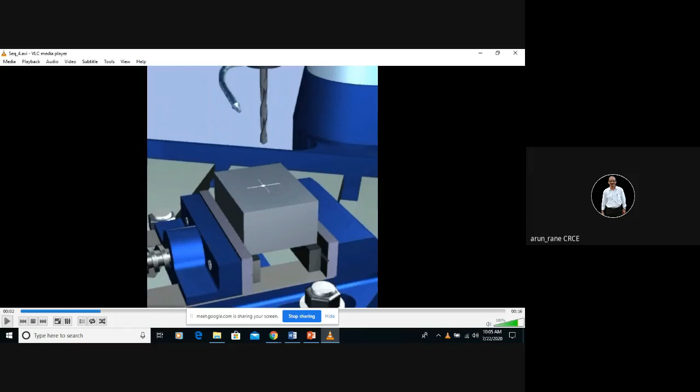So, one small video. The screen is visible, isn't it, Rutika? Yes, sir, screen is visible. So this is a small video on a drilling machine. This is a workpiece which is clamped in a vise. This is called a vise.

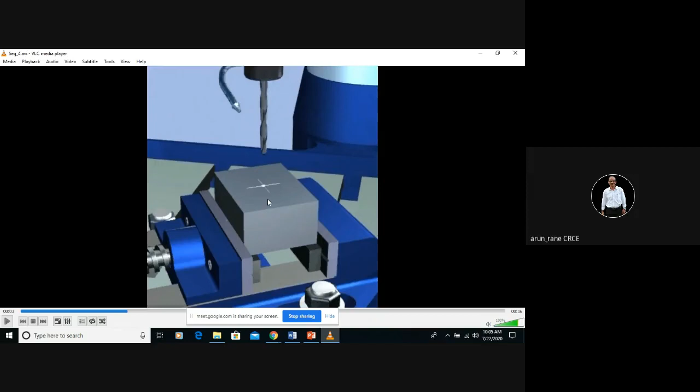Now, as I told you, you have to do marking. If you are not using a jig, then for every piece you have to do the marking like this. First, you apply Prussian blue on the surface so the marking will be visible. Then you center punch, use the center drill, and follow with a drill. So if you are not using a drill jig, you have to do all this process. If you are using a drill jig, this is not required.

This is your coolant, this is the drill. This is called the drill chuck. This is your workpiece, and these are called the parallel blocks on which the workpiece is kept.

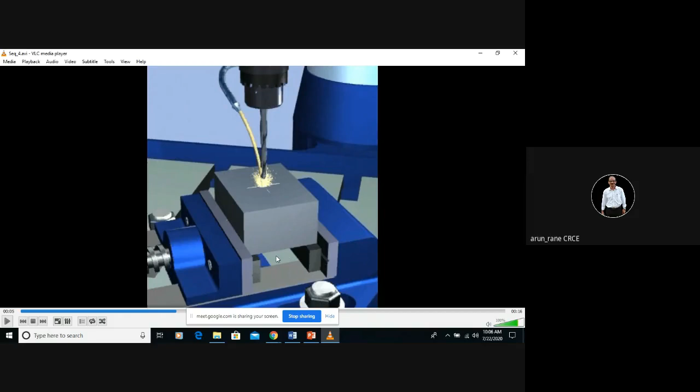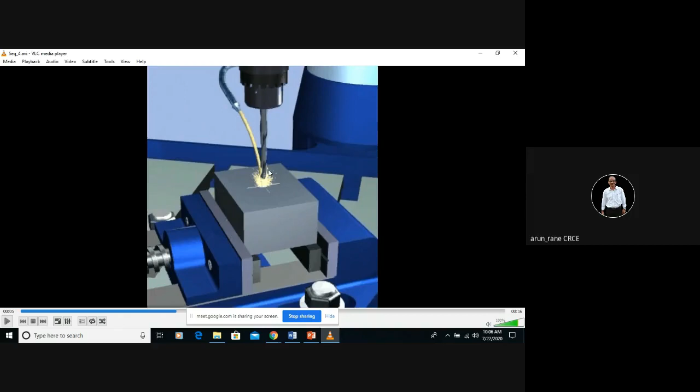Now you have to see that whatever hole you are drilling, it will pass through, meaning the drill should not touch any blocks or other pieces kept below the workpiece. There has to be a clear hollow portion so the drill will not touch, get damaged, or break. So that care you have to take.

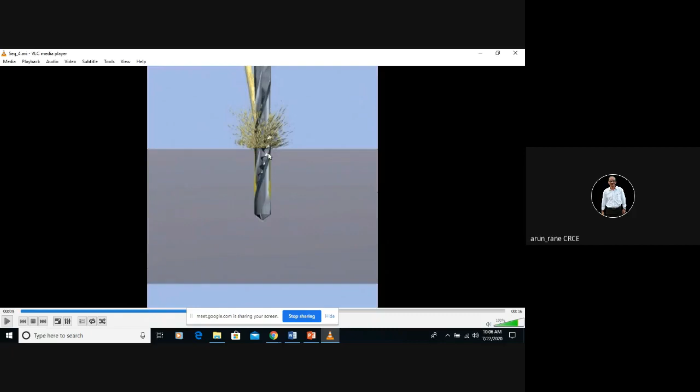So this is how the drilling takes place. These are the chips coming out of the flute. The function of the flute is to guide and remove the chips. If the flutes are not there, there is no way for the chips to come out. The chip will get blocked and then the drill will break because of the chip force. This is how the chips are coming out.

One more short video, same thing but in close up. This is how the chips come out. This is for dry cutting - we are not using any coolant here.

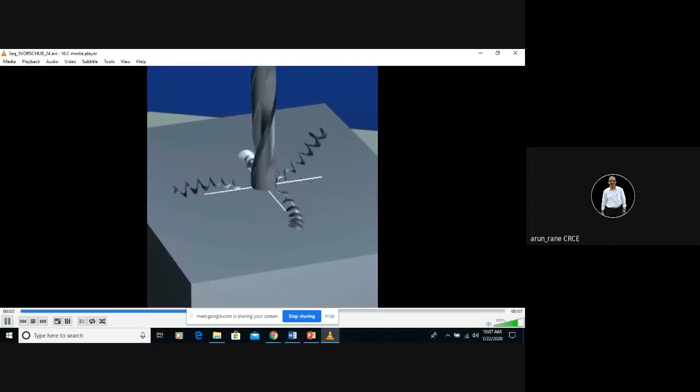Some images, drill images, and how the drill machine looks like, I'll show you one by one. Just have a close look at this image because this is important from your examination point of view. The question that will be asked is for 5 marks.

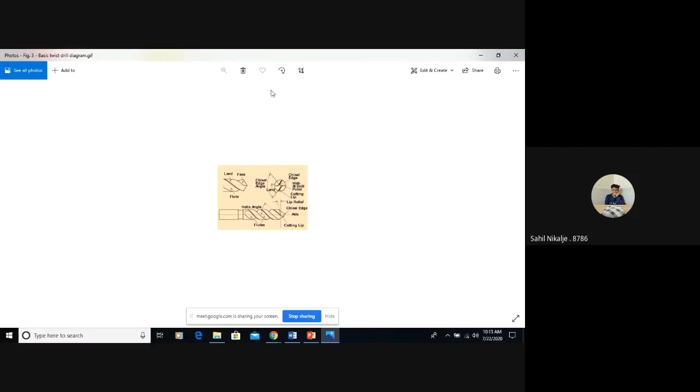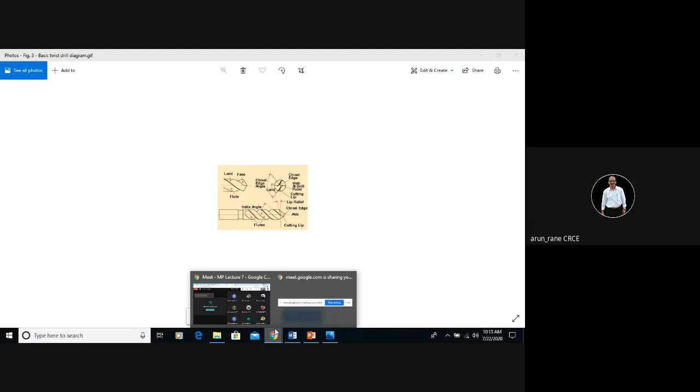Sorry. So Arnold wants to join in too. Just a minute, he always comes late. I don't know why even Dimple is constantly trying. Hello, yeah. I already admitted, no? Okay, okay, fine, I'm in the lecture now. I'll admit you, alright. Just hold on, just hold on.

I cannot see you waiting. Yes, just join again, please.

Problem is I can't see anyone waiting. Everybody has been admitted. Have you put the code properly? Link this, then there should not be any issue. Yeah please, please try again. I can't see anyone waiting. Stop sharing again. Sir, I think you should restart again because yesterday the same thing happened to me also, me and Madhvendra, same thing.

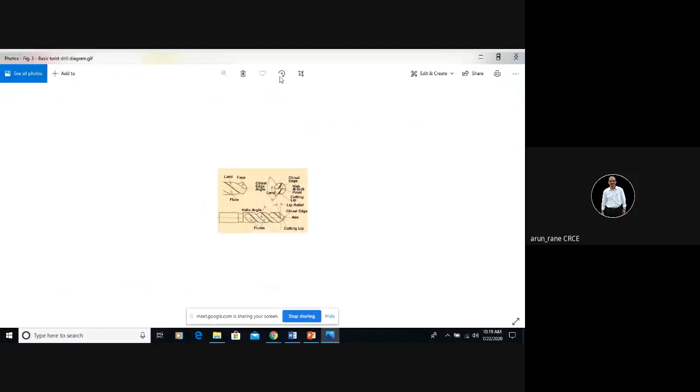Same diagram as earlier, it's the same diagram. I will suggest that you can use this diagram, which is more clear and it is easy also to draw this drilling machine.

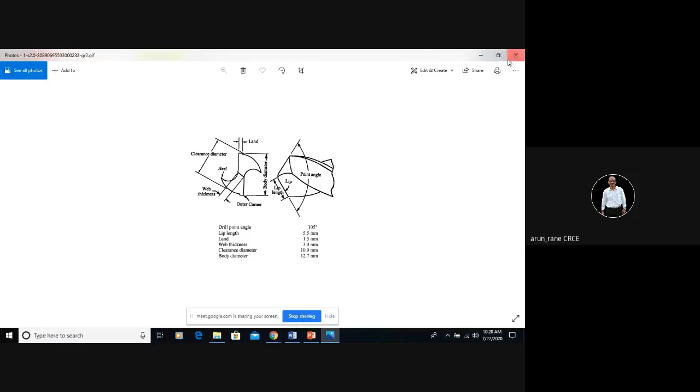The image loading is taking time. It depends upon the internet connectivity also. It's taking time to load. You'll have to hang on.

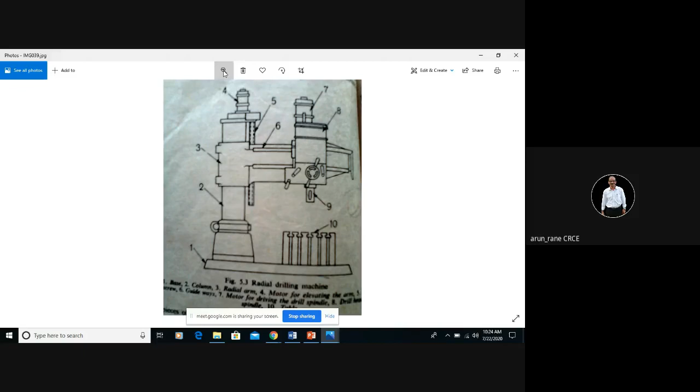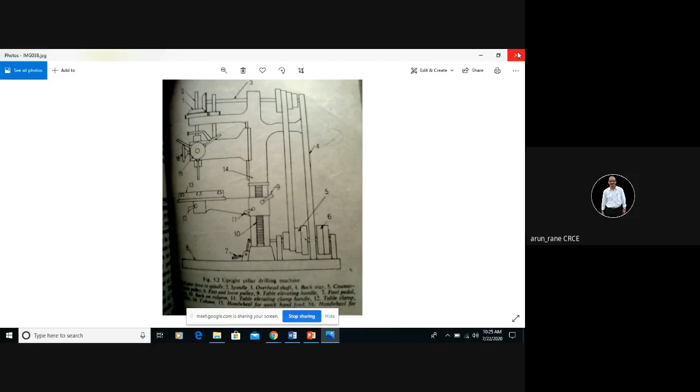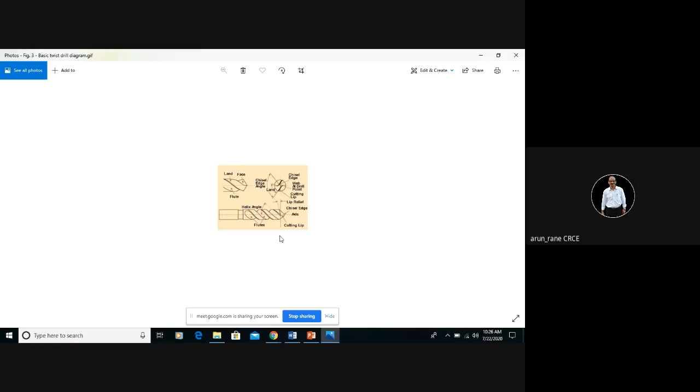I wanted to maximize this, but it is not. Okay.

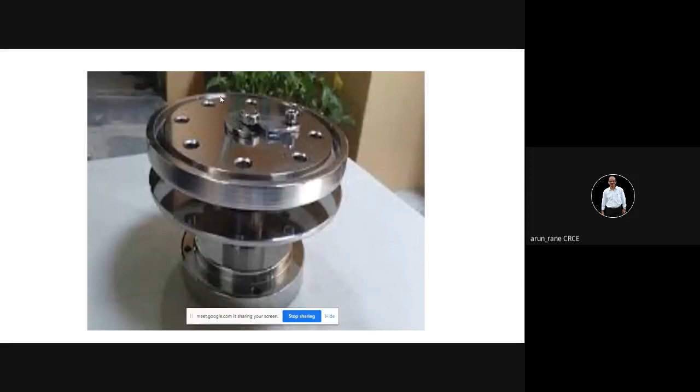Among the different types of drill jigs, this is the channel drill jig. This is what is called the drill bush. The drill is passed through this, and this is kept on the table of the drilling machine. You simply pass the drill through this, no need of marking, no need of center punching.

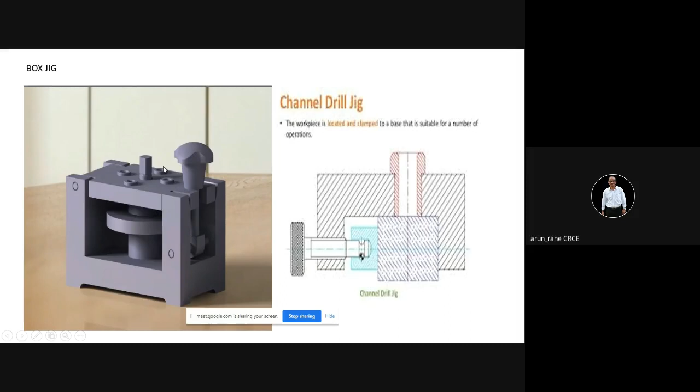Once the drilling is done, loosen this knob and remove this plate. This plate rotates along this hinge. So swing this, remove the component, remove the chips. Give an air blow so the chips are removed, then place another component. Again swing this work plate, lock it with the knob, and carry on the drilling operation. So it is very fast. This is how it looks like.

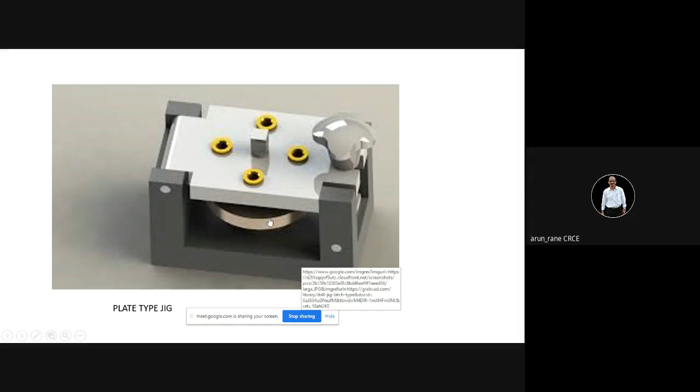I have been telling you, the drill is passed through this. If it is soft, it will get damaged, become oversized, and then accuracy will be lost. So you just remove this knob. This is the swivel, or the hinge. Rotate this, swing this plate, remove the component, air blow to remove the chips, place another component, and the cycle repeats.

So the channel jig is also easy to draw. Now here, how many holes can you drill here? One, two, and three, one more from the side. But remember, all these jigs are used for smaller jobs which can be handled manually, up to about 5 kg workpiece.

These are called the locators. So the component gets located along these buttons, and you are using this clamp. So every time, piece after piece, you will get the same position of the drill.

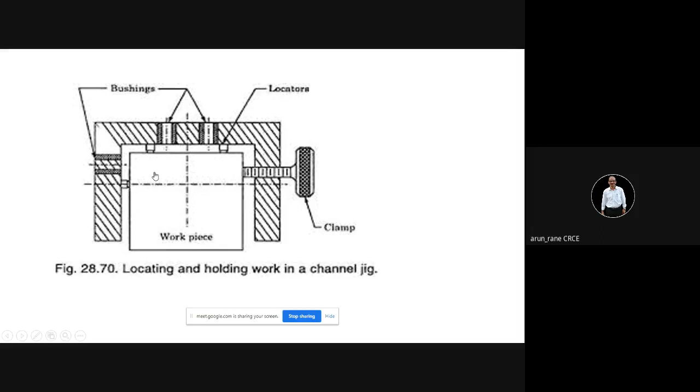This is how the drills can be held in the drilling machine. Drill chuck is the most popular.

This is the knurling provided on the drill chuck, so you can tighten it by hand also. The knurling is used to give a good grip. If you want to tighten it still harder, then you can use the key. This is called the drill chuck key.

Either you can do it manually, or finally you can do it with the key, so that the drill gets tightened properly. These are called the jaws, small jaws. So once you rotate this, all the three jaws collapse inside simultaneously. If you rotate the key the other way, then this will open, and the drill can be removed easily.

You have another way of holding the drills, which is called the drill sleeve and drill socket. This comes under the drilling machine accessories. Here drill chuck can hold only parallel shank drill.

You know what is shank. Shank is nothing but the round portion of the drill, not the fluted portion. The entire drill is divided into two parts, one is fluted and another is round. So the round portion, if the drill shank is round, that is called the parallel shank round straight drill, then you can use the drill chuck.

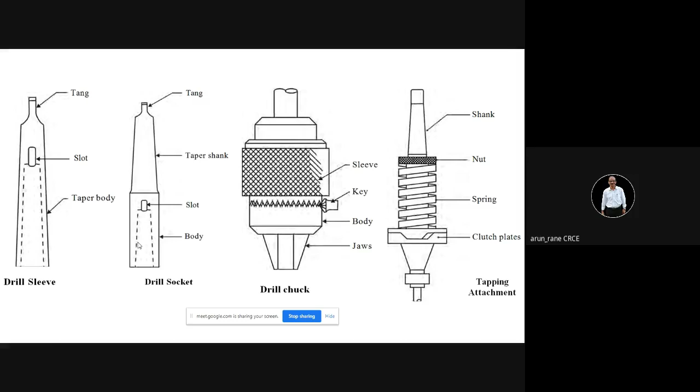And remember, if you are trying to remove the drill the moment the drilling is done, the drill is also in hot condition, it gets heated, so your hand may get burned. So play safe whenever you are working on any rotating machines.

This is how it will look like in the photograph. This is Jacobs, Jacobs is the name. These are the teeth, and you have a chuck key here which you have to insert in this hole. This is also called the teeth.

Now these teeth are not spur, not helical gear. These teeth are the type of bevel gear, and these are called the pinion and crown wheel. This comes under the category of crown and crown wheel, that is used in the differential gearbox in case of automobiles. Same principle, crown and crown wheel.

And these are the jaws which move inside and outside. This is called the three-jaw self-centering chuck. Why is it called self-centering? Because the moment you insert the key, all three jaws will move inside and move out simultaneously.

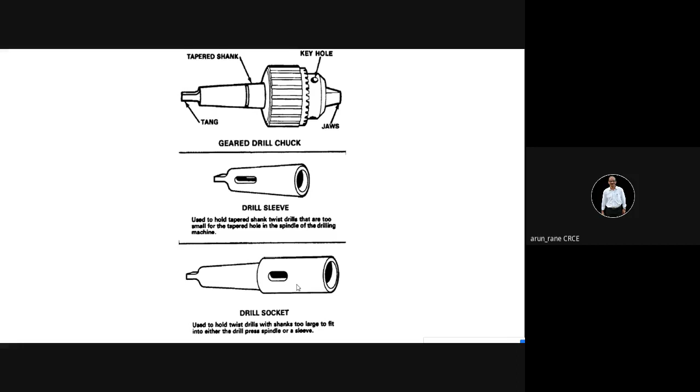As I told, deep hole drilling applies when the length of the holes to be drilled is more, like injection molding machines, screw and barrel. In injection molding machines, the barrels are quite long, you know, 10 feet long, 15 feet long. You can imagine, sometimes even 20 feet long. 20 feet long means how much? Generally 6 feet is the height of a person, so that's more than three persons, that much.

So in that case, if you want to do drilling, the first problem is which drill to use. You cannot have such a long drill, like suppose 20 feet long drilling. So you should have a drill length more than 20 feet. That is one thing. Second thing is diameter to length ratio.

Like I want to drill 20 feet, 50 mm diameter. So the L by D ratio is very high, so the drill will break. You cannot manufacture it either. And third is how to remove the chips.

Generally, the L by D ratio should not be more than 4 or 5. 4 is safe. That means the L by D ratio, that is length to diameter ratio — if it is a 25 mm drill, it can safely drill up to 100 mm.

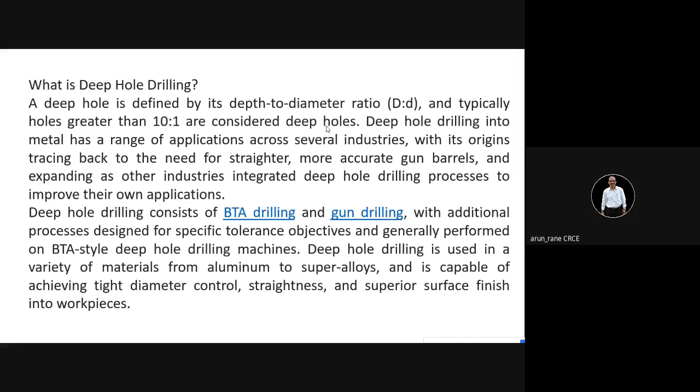So in such cases, when the drill depths are more, that time you use deep hole drilling. Deep hole drilling is also called gun drilling, or the gun drilling machine. But deep hole drilling is not there in your syllabus, right?

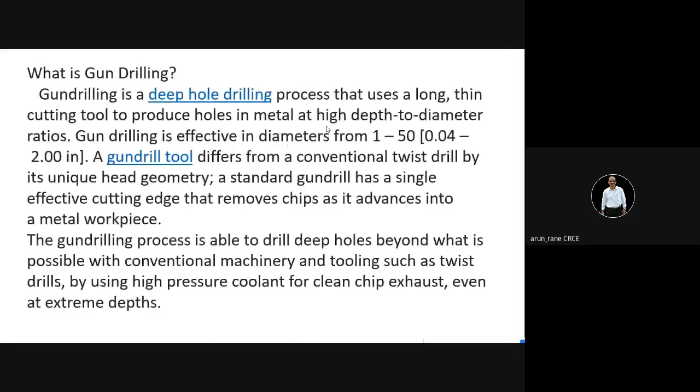Anybody who is interested can read this, but from the examination point of view, you don't have to learn this. I have given enough material on gun drilling.

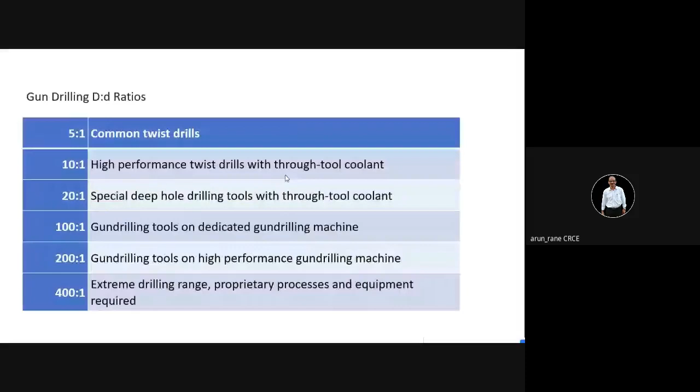These drills are also called the twist drill. Why is it called the twist drill? Because the flutes are twisted. The flutes on the drill are twisted.

I'll show you the principle of the gun drilling machine. In gun drilling machine, you can go 2 feet, 3 feet, 4 feet, 5 feet. These are special kinds of drills called gun drills, in which there is a passage from the inside. This is a hollow tube, and the cutting portion is at the front only, and it's hollow inside, so that your chips can flow from inside and fall down.

So your pressurized coolant goes from outside and chips come from inside. This is how gun drilling works. Remember, in case of drilling, you have to take care of chips. Chips have to be removed properly. If the chips are not removed, then it will fail.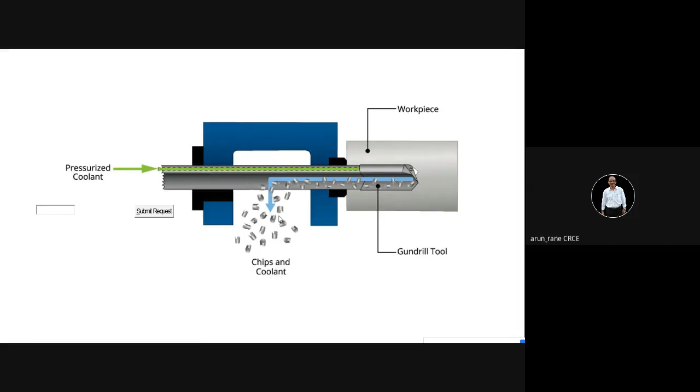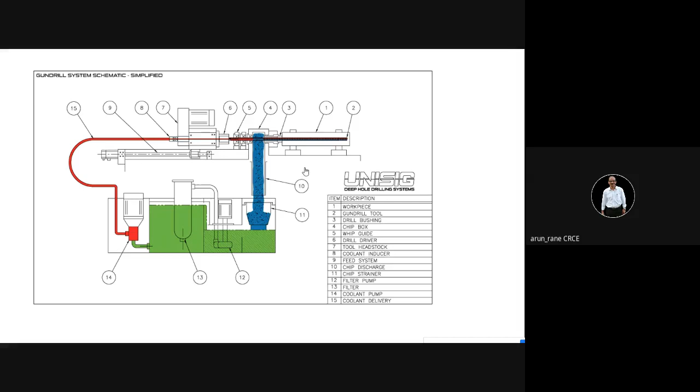This is a complete arrangement of the gun drilling machine. That is how to recirculate the coolant, and how to remove or separate the chips out of the coolant, because there has to be some kind of mechanism, since the coolant is also returning from the center. So there has to be some mechanism in which your coolant as well as chips can be separated.

This is not important from the examination point of view, or rather not in the syllabus, but since it is a very important application, I showed you. This is how a typical gun drilling machine looks like. Remember, gun drilling machines are always horizontal. The gun drill moves in horizontal direction. The workpiece, the huge or long workpieces, are mounted here, and then drilling is done.

Suppose you don't have a gun drilling machine, then how to do it? If you visit Ashirwad Industrial Estate in Goregaon, Ram Mandir Road, you will see many machine shops doing this kind of long drilling, but they are not using a gun drilling machine. They do it on a conventional horizontal drilling machine only. What they do first is use a smaller drill in length, like say half a feet.

Then to that drill they braze a round bar, and they go 1 feet deep. Then again they use a 2 feet round bar, brazed to the drill, and they go 2 feet deep inside. So, like that, step by step.

And then they rotate or reverse the component. Suppose if they want to do 20 feet drilling, then 10 feet from one side and 10 feet from the other side, like how we do a tunnel. Tunnel is also a kind of drilling operation, isn't it? So if you want to do tunneling very fast, then from both sides, like from Bombay to Delhi, we'll start tunneling from Bombay, and simultaneously from Delhi also, and they are perfectly matched, with no misalignment. Same way, these people do the drilling operation for longer holes.

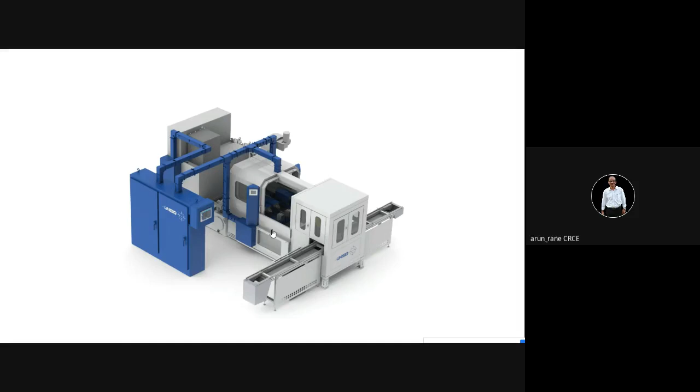This is what your gun drilling machine is.

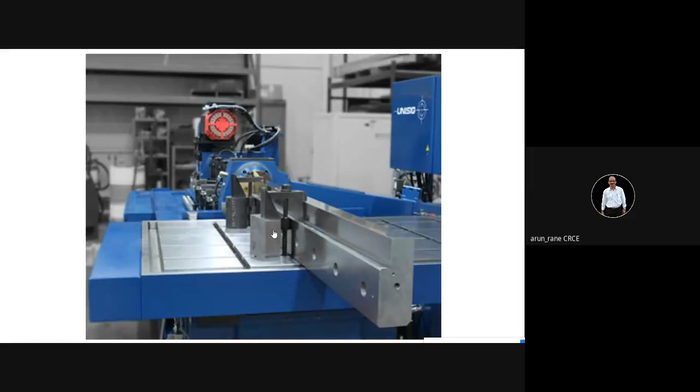Whereas boring is nothing but to enlarge the existing hole. Like I had given the example, if I want to make a hole of say 35.84, then I don't have that drill. So what I do is use a drill of 35, and then from 35 to 35.84 I do boring. So boring can be done by this kind of tool, or you can use a boring bar.

Normally we don't use this, we use a boring bar, and generally we do it on the boring machine. But if you want to do the boring operation on a drilling machine, then we are not supposed to use a boring bar. In that case, we have to use this tool, called the boring and trepanning tool.

Remember, in case of a drilling machine, you have to always apply the force vertically, like this in the Z axis. This is what is called the thrust force. The drilling machines are designed only for taking the thrust force and not for any other force.

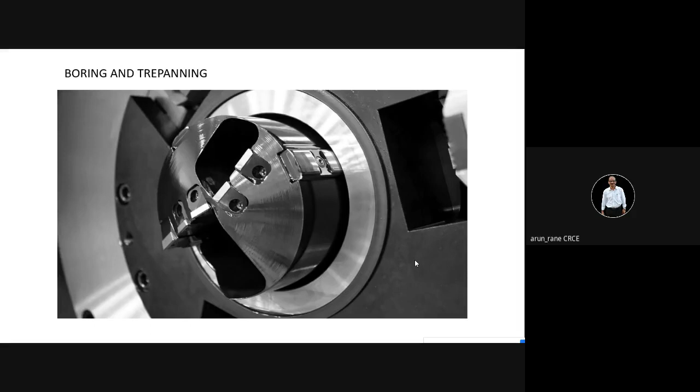Remember, this is a boring bar. This is what a boring bar is, and this is the tip or point which does the cutting or which enlarges the hole.

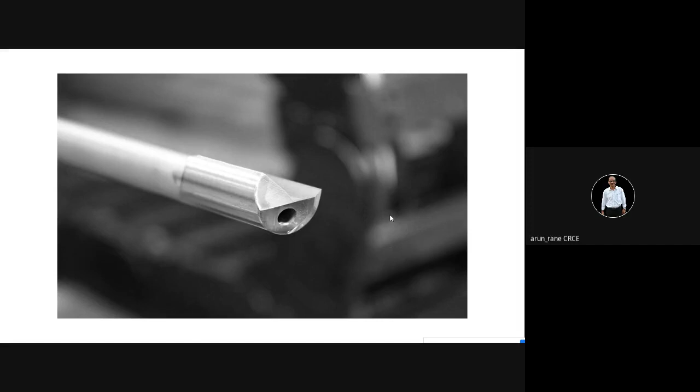This is how a typical boring bar will look like. Now this tip can be moved in and out so that the hole sizes can be varied.

You also have a fixed boring bar. Fixed boring bar means it will only do one size, for example 25.5. So it will do only 25.5. But if I want to do 25.6, then what? For that you should have some flexibility. So in that case, we don't go for a fixed boring bar.

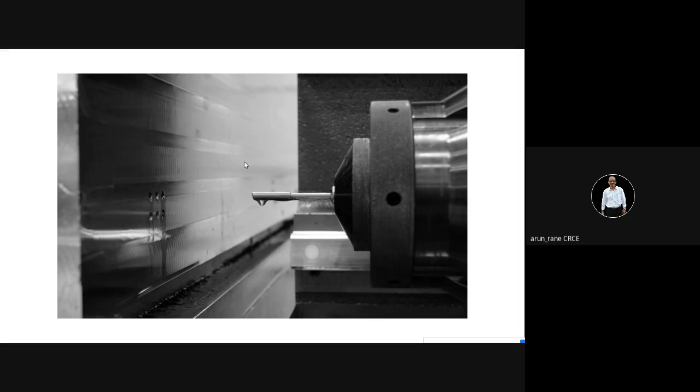This is again a gun drill, and not a boring bar. In the gun drill, this portion is going to cut. Look at this, the size of this is smaller than this. And this is the flute through which your chips are flowing.

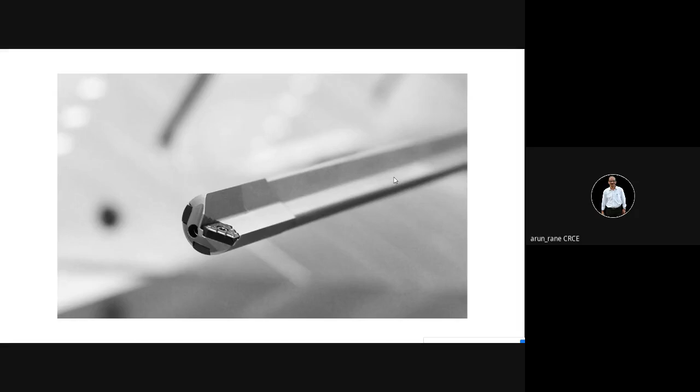BTA drilling is again not there in your syllabus. I'll only give you some basics. In case of BTA drilling, you use inserts, coated inserts, that is one thing.

And second thing is you can see this. The beauty of this BTA drilling is you can move these inserts in and out, so it can be used as a boring bar. With the help of this, you can adjust these inserts, move them in and out so that you can vary the size.

Normally in drilling, the size is fixed. A 10 mm drill will only do drilling of 10 mm, but here, if this is say 25, it has a range. It can do drilling from 25 to 27 or 28, depending upon what range that drilling head has.

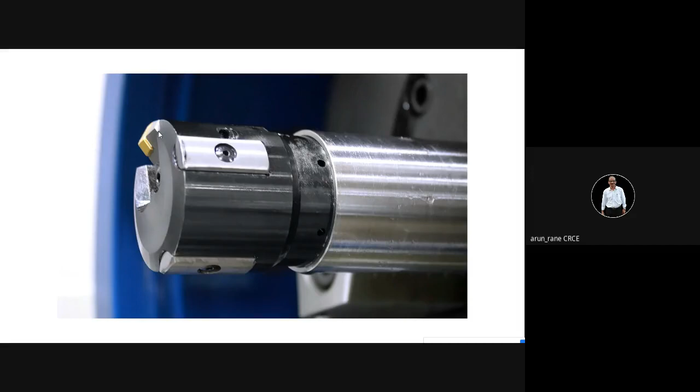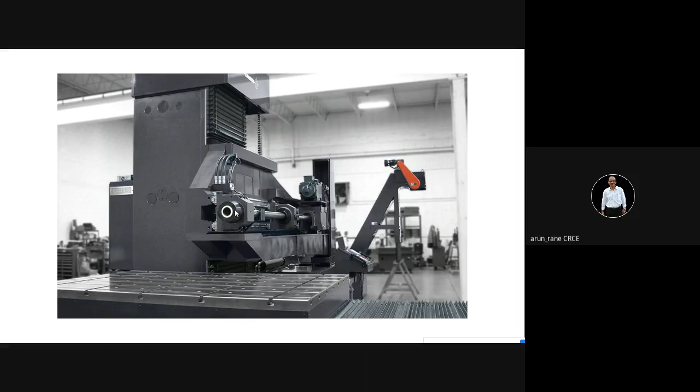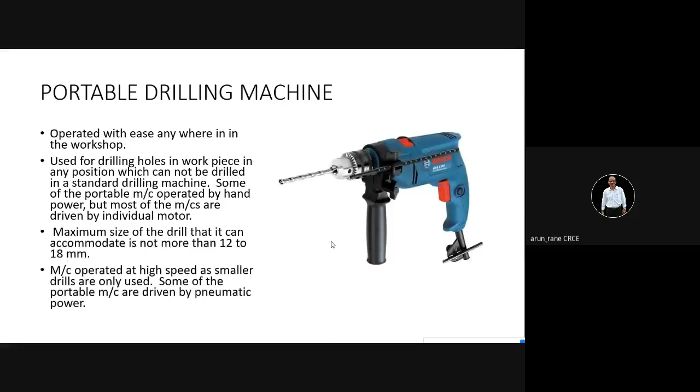But the disadvantage is that it cannot take heavier workpieces. Because the basic principle is, if you want to do heavier workpiece machining, then your workpiece should not move. Your workpiece should remain stationary. That is the principle, so in that case you have to always go for a fixed bed type machine.

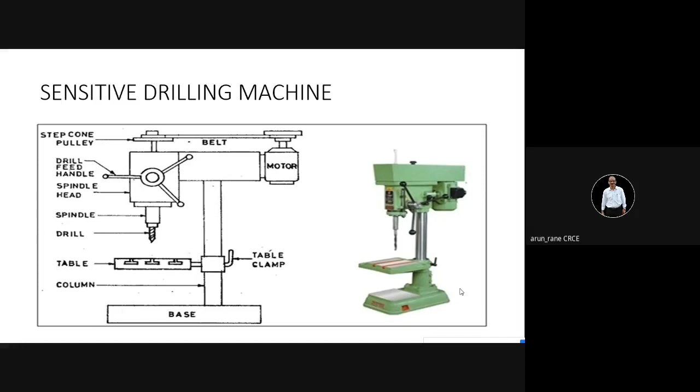Also, you can move the drill in auto. The purpose of moving the drill in auto is that you get a good finish. That is one thing. Second, if you want to do reaming - reaming is another operation used for finishing the hole. If you want the hole size very accurate and a good finish, then you have to go for reaming.

Reaming cannot be done manually, because then you don't get a good finish. So reaming has to be done in auto mode, in automatic feed. That's why most drilling machines have this facility of auto feed. Remember, when calculating the machining time for drilling and reaming, this has a weightage of 5 to 10 marks.

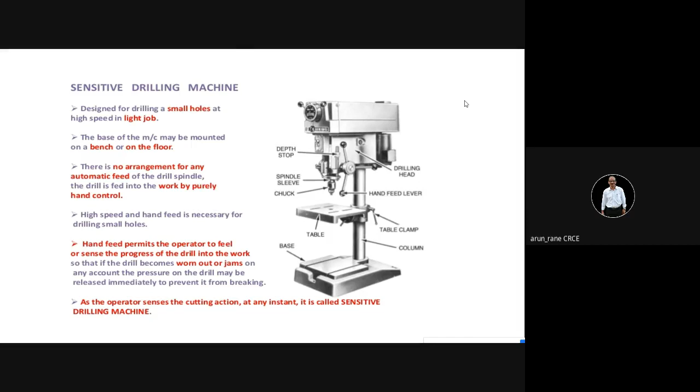Remember this, please write it down. Otherwise you will not get full marks, some marks will be cut. Nowadays we don't get straight away zero - even if the answer is wrong, we give some marks for the steps.

Earlier, when we learned, even for a single mistake, or if the final answer was wrong, we used to get 0 marks. For instance, if the circuit diagram didn't show the switch, we used to get 0 marks. Our teacher used to say, 'Hey, there's no switch, will the circuit work?' No. Then it is wrong, and wrong means you are entitled to get 0 marks. But now no such thing - even if you make mistakes, like not showing the switch, you just lose half a mark or 1 mark, like that.

So this is another sensitive type of drilling machine. This is a drill, you have a provision for coolant also. Again, this can be moved up and down. There is a facility for lubrication also.

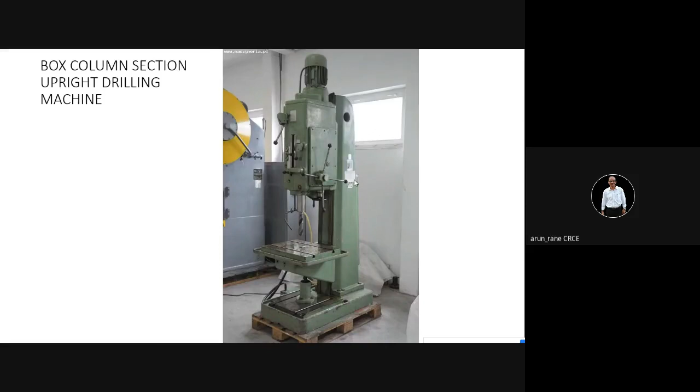That machine is called the upright drilling machine. Upright means it can move up and down. The photographs I showed, but you cannot sketch, isn't it? So if you want to sketch, you can sketch this. Pillar or upright - this is what is called the pillar. It is also called the column. Column and pillar, same thing. Now you are aware of this, so I did not spend much time on this.

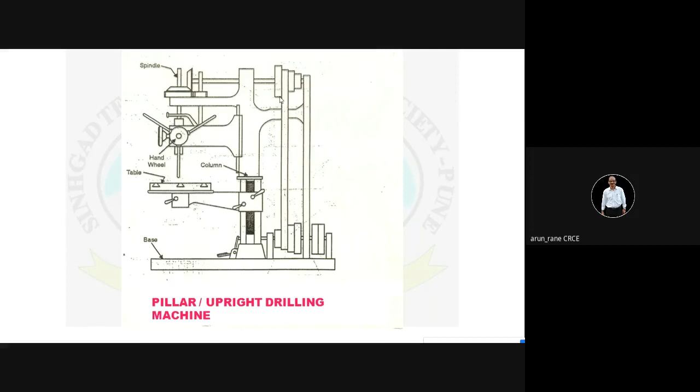And what is this? This is of course a belt. And if you want to obtain different speeds, then obviously you have to move the belt from one pulley to another pulley.

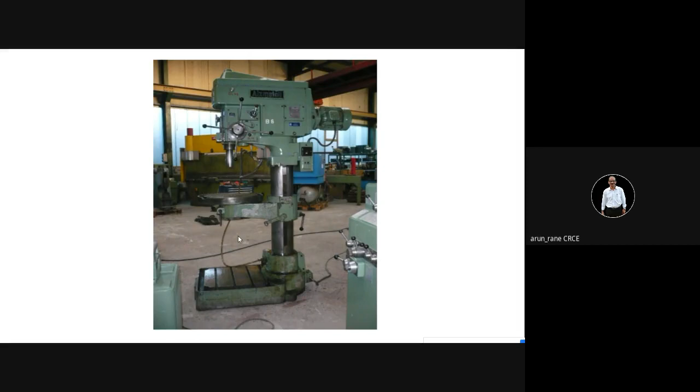This is again a geared type upright drilling machine, and you have a rotary table. Here, this is a rotary table. Suppose if you want to do a series of holes in an arc or in a circle, then in that case rotary table is helpful. Like suppose if you want to do 6 holes, so 6 holes will be at 60 degrees, so you have to just rotate the table at 60 degrees. You don't have to move the workpiece, you don't have to do any alignment, so just rotate the rotary table 60 degrees, do the drilling. Then second hole, rotate 60 degrees, do the drilling, like that. So it is fast. So rotary table is also an accessory in case of drilling machine.

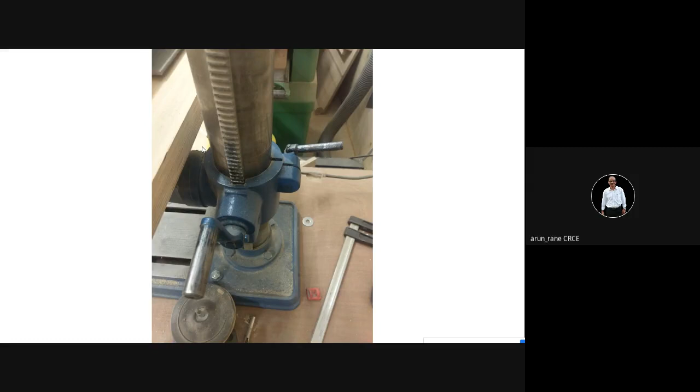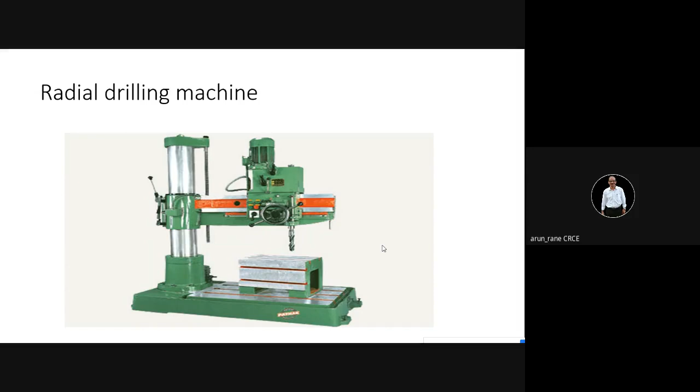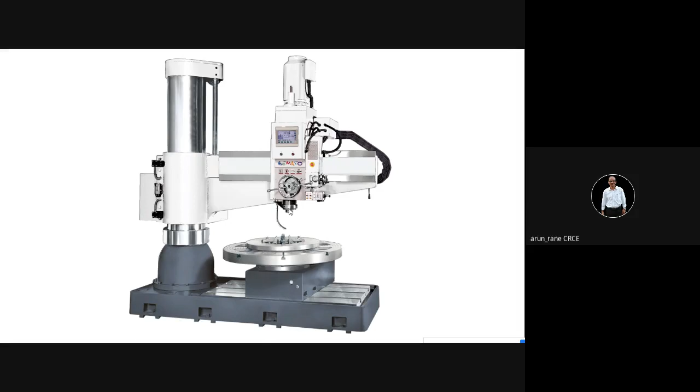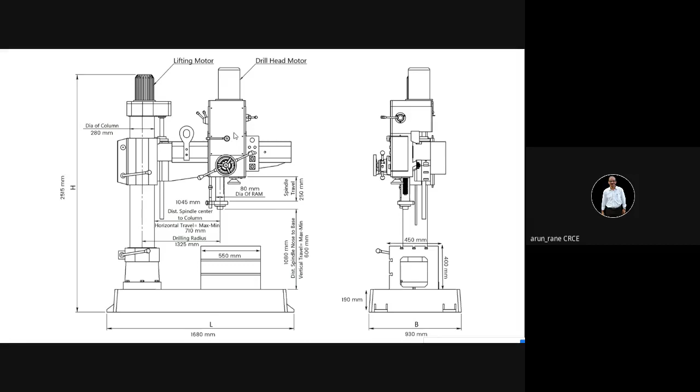So the question that can be asked is how the drill machine is specified, how the lathe machine is specified, and how the milling machine is specified. That's all, not more than that. So radial drilling machine, already discussed. You can use this sketch if you wish, but the earlier one was better.

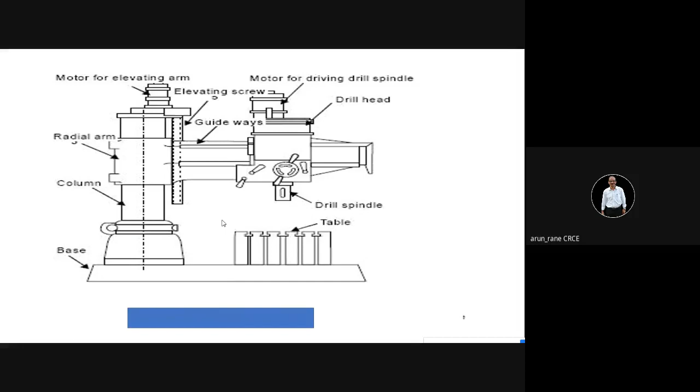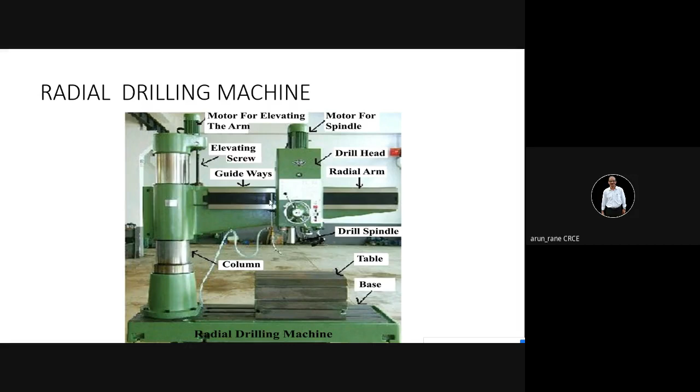This is called the column. As I told, these are the guide ways. Along this column, the entire machine moves or swings. Now there are other machines called universal and semi-universal.

In case of semi-universal, note this: it can be swung, it can be rotated. The entire drilling head can be rotated along this axis. Suppose if I call this the x-axis, and this the z-axis, then the entire head can be rotated about the x-axis with the help of this. That is what is semi-universal.

And in case of universal, it can be rotated along this also, so along this and along this. So in case of universal, it can be rotated about the y-axis as well as the x-axis. Rotation about the z-axis you don't have to bother about, you can use the rotary table, isn't it? So the rotation of the rotary table is nothing but the z-axis.

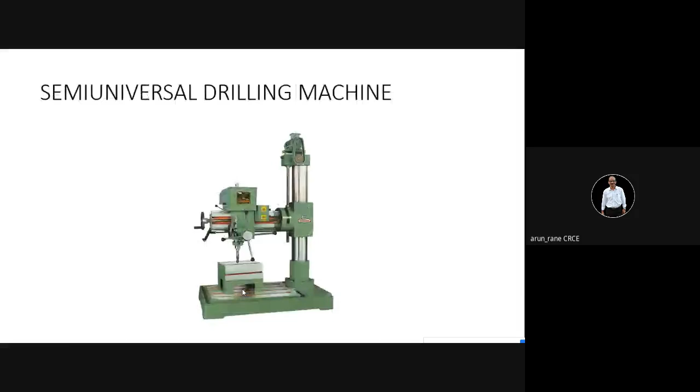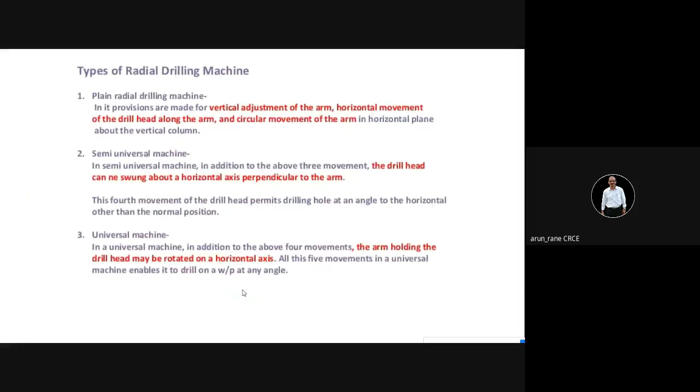Then you have gang drilling machine. Gang means more than one person, usually three or four people, isn't it? So gang drilling machine means you have four spindles at a time, so all these four operations will be done simultaneously. So it is faster, for mass production. But for repetitive components, same and same components, usually in the automobile industry, gang drilling machine is used.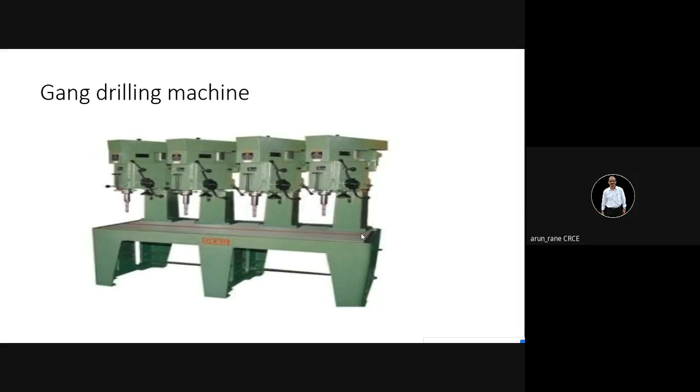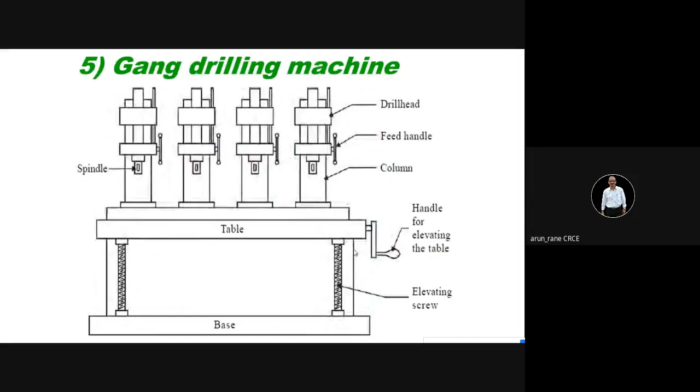This is how it will look like, gang drilling machines. So at a time, four holes will be drilled. This is a type of drilling machine.

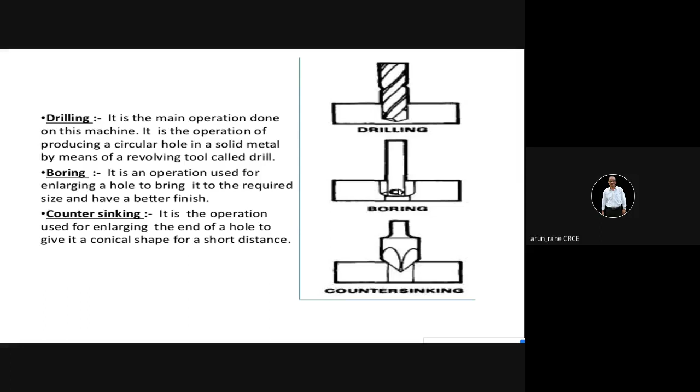These are the different operations which can be performed on the drilling machine. One is drilling, then another is boring. Boring is nothing but enlarging the hole, and then countersinking. Countersinking means chamfering. Then reaming. This is important, what are the different operations that can be done on a drilling machine. So drilling, boring, countersinking, reaming, counter boring, then tapping. Tapping is nothing but internal threading.

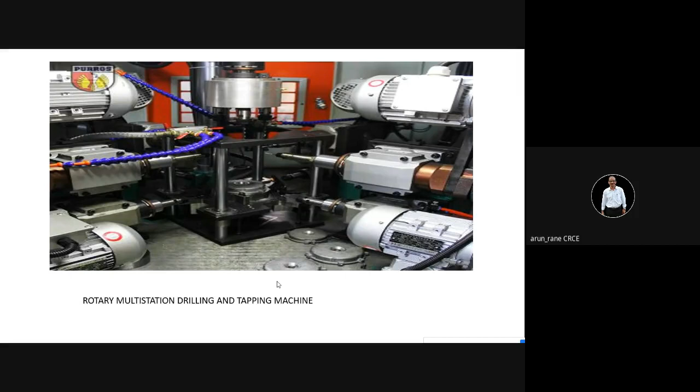So it can be asked for 5 marks, remember. So you have a special purpose machine in drilling machines, called the rotary multi-station drilling and tapping machine. So it's an SPM, just for your knowledge.

So from the examination point of view: how the drilling machine is specified, what are the different operations that can be done on the drilling machine, what are the types of drilling machine - four to five questions. That is, what are the different operations, then type of the drilling machine, how the drill machine is specified, then draw and sketch the radial drill machine. So four to five typical questions, and the fifth question will be numerical.